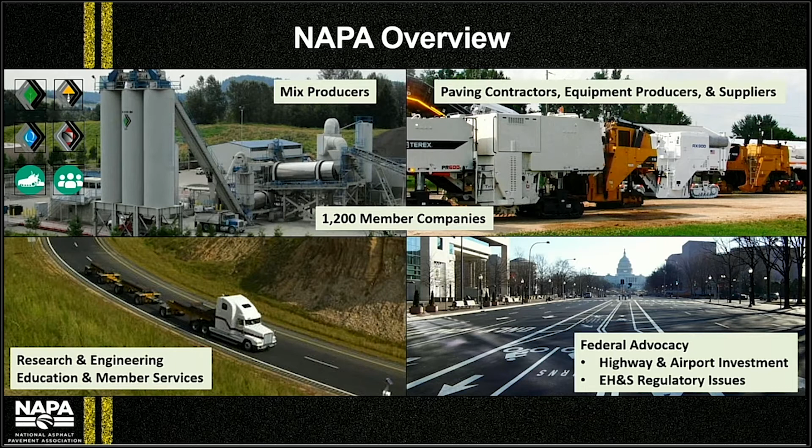Well, I think the easiest thing is to start with the Federal Highways definition. They define this in a reference document they compiled a few years ago. They say that sustainable pavements should, one, achieve the engineering goals for which they're constructed, right? So if you're thinking about it from that perspective, you got to make it well. Sure, absolutely. Quality is job one, right? Yes. Two is preserve and ideally restore surrounding ecosystems.

So how can a pavement restore an ecosystem? You ever wonder about that? We've talked about that here. We've actually had some webinars on that. Absolutely. Interesting. So I like to think of porous pavement as being restorative, because you restore that natural hydrological function of rainwater recharging the groundwater underneath and not just running off into the storm drain system.

Yeah. And then the third one here is using financial, human, and environmental resources economically. Okay. What does this mean? It means don't waste, right? Don't waste time, don't waste money.

Don't waste the environment. Don't waste our natural resources that we have, right? That makes sense. Yeah, and then the last one is meeting human needs such as health, safety, equity, employment, comfort, and happiness. And I really like the happiness one.

Sure. Do pavements make you happy? They do when I'm driving on them. I sure hope so. My story about this is when I was in high school growing up in South Pennsylvania, Route 1, you probably know about Route 1 even if you don't live on the East Coast. Old concrete highway, you're driving down the road, all the joints. And I used to hate driving on Route 1.

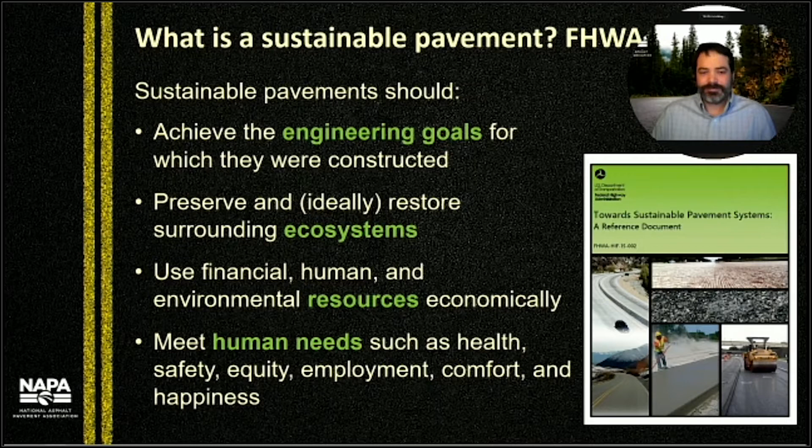There's a lot going on there, even further than a lot of people think about when we talk about sustainability. But there's other terms out there now as well, like EPD, LCA. So help us understand a little bit more about what those terms mean as we move forward through this program. Yeah, good question. When you think about sustainability, one of the things that people want to do is quantify it. What are the total impacts in a real number that you can attribute to a material or pavement. And you do that through what's called a life cycle assessment.

Okay. Now, an EPD, all it is is an LCA that meets certain requirements, which are described in something called a set of product category rules for individual types of products. And it meets all the requirements for conducting that LCA, and then it discloses them in a report called an EPD. That's the declaration, Environmental Product Declaration.

And an EPD, in most cases, is only looking at those first initial life cycle stages. Materials, what are the impacts of extracting and processing the raw materials? So this is the aggregate production and binder production, for our case, transporting those materials to your plant, and then your plant operations. So an environmental product declaration, it's not just an asphalt thing.

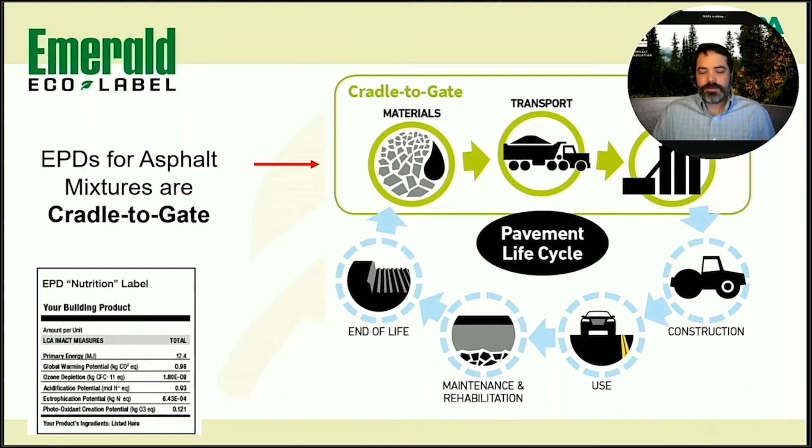I mean, traffic and use, it's really kind of a wild card as far as trying to get a hold of that. But how detailed does this process get? Yeah, good question. So we do focus on those initial life cycle stages because that's what we have control over. The other ones, you're going to start looking at the agency to do that full life cycle assessment for their road, right? It's more of a road thing.

Okay. But getting into the EPD itself, this is an example of one of the data tables that's going to be in the EPD for an asphalt mix. The whole thing's about 5 pages long, and there's a few data tables. There's a lot of description. But this is the one that most people tend to be interested in. And what you see here is a number of environmental impact categories on the left. The first one is the global warming potential, and that's in kilograms of CO2 equivalent. So it takes all the nitrous oxide, methane, and CO2 emissions and other greenhouse gas emissions and puts them into a single unit that makes it easy to compare.

Okay. And then there's other impact categories like ozone depletion. Remember the hole in the ozone layer back in the 90s? We were all concerned about that. Yep. Acidification for acid rain. Eutrophication, that's the dead zone, right, off of the Mississippi Delta, for example, and the Gulf. Oh, okay. So that's that eutrophication potential. So these are some of the things, and the smog is going to be obviously the direct smog producing emissions.

Well, and then this is, go ahead. This is quantified then for each of those first three stages. A1 is materials, A2 is transport, and A3 is mix production. So then the sum of those is the impact for each one of those different areas then? Correct. Gotcha.

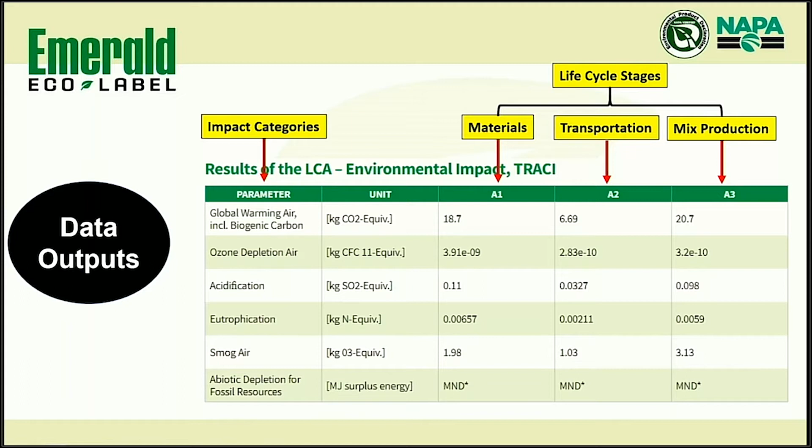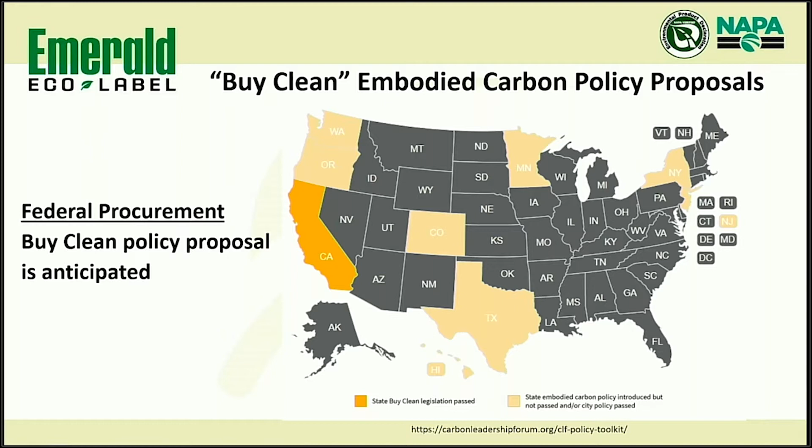But so what are we going to use? What's the purpose? What do we use the label for? So this initially started because the U.S. Green Building Council back in, I want to say 2012 or so, was putting together a revision for their LEED program. And they said, in this next version of LEED, we're gonna use EPDs as part of our credit criteria for earning credits. It took them a long time to revise the actual LEED program to do that. But now most of the green rating systems, LEED and others, are all using EPDs.

But also agencies are looking at it potentially for decision making. And the first one that's doing this is California right now. They've actually passed an act. Their act does not apply directly to asphalt, but Caltrans is collecting EPDs for transportation projects, including asphalt and aggregates. Okay. And that's on a pilot basis. So it's not a kind of regulatory requirement, but they're just doing it because they say we want to manage this at the agency level and not be kind of constrained by state law.

And then the lightly shaded yellow on this map, these are all places where there have been either state or local proposals for similar legislation. So City of Austin had a proposal a couple of years ago. That's why they're on here. More importantly, there's currently a draft bill that's been introduced to the House on a federal buy clean policy. And there's also in the works, the GSA, from what I've been told, is planning to put together a proposal to incorporate EPDs into direct federal procurement. So this would be anything you're doing with national parks, DOD facilities, presumably, right? So it's coming. It's on the horizon.

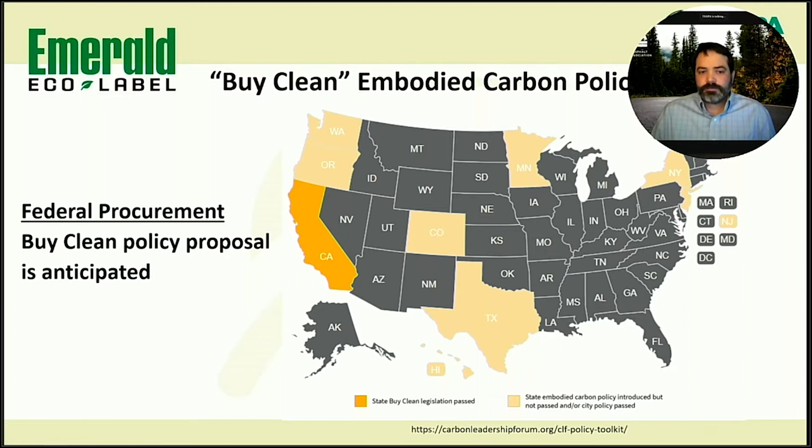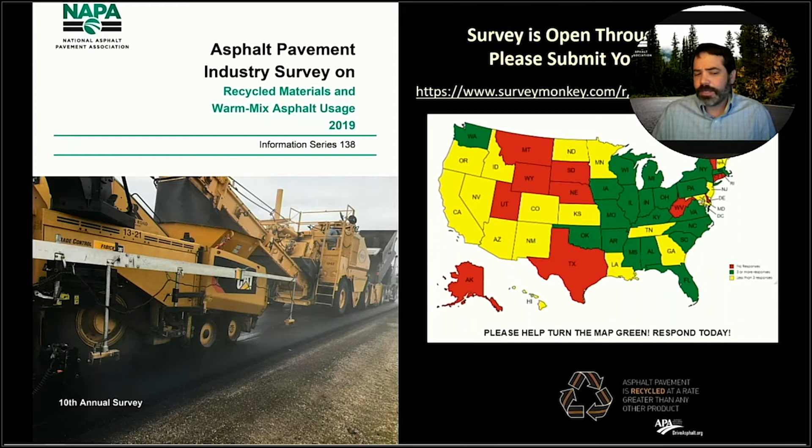So, all right. Given all that, let's talk a little bit more about asphalt and maybe some of the sustainable features involved therein. So I think one of the things that I love about this industry is our history of recycling. If you're in this industry, we use a lot of RAP. I think nationwide in 2019, almost 90 million tons of RAP was used. That's a lot of material.

Is it true? I've read this a couple places. Is it true that asphalt is recycled more than all the other major recycled materials together? Like recycling paper and plastic and steel. If that's true, that's crazy. That's a big number. So there's a few different ways to cut it, and in some measures, yes, that would be the case. To me, the measure where we're the leader is the percentage of material generated that's recycled. So that's where we're clearly a leader.

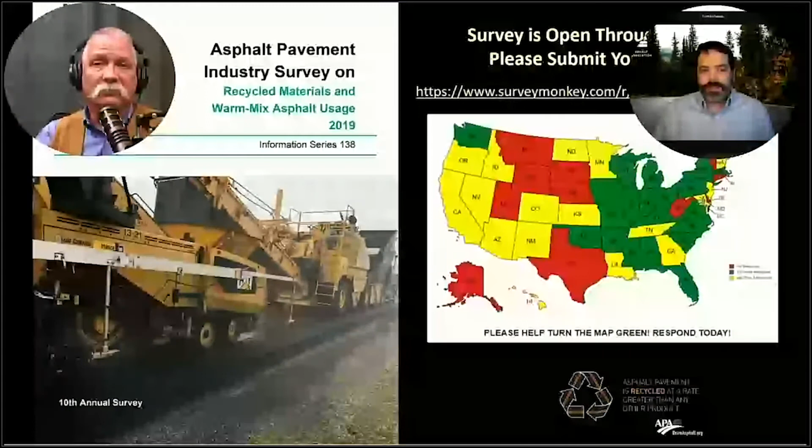Okay. You look at concrete, there's more concrete recycled technically per year, but most of that's going into low value aggregate materials. The difference with asphalt is that you're reusing that cementitious property of the binder, right? And that's at the highest level you can. Exactly. Highest and best use. That's it. Highest and best use.

I was trying to remember what that was. So we're actually getting the full value back out of that material, where some other materials are used for waste, or they're burned. Something's done with it, they're not just thrown away, but they're really not using it back into the actual product in the way it was originally designed to be used. And I think that's a pretty cool thing about our product.

Right. So one of the things that we do every year, for now 10 years, we've been collecting industry data on how much recycling we do, whether it's RAP or RAS or other materials, and also our warm mix usage. My call to action for folks from Texas watching this is we're collecting our data. You see Texas on this map is red. It's a little bit out of date, from a couple weeks ago. At that time, we hadn't received any responses.

Oh, that's not Texas good. All right, boys, step up, cowboy up.

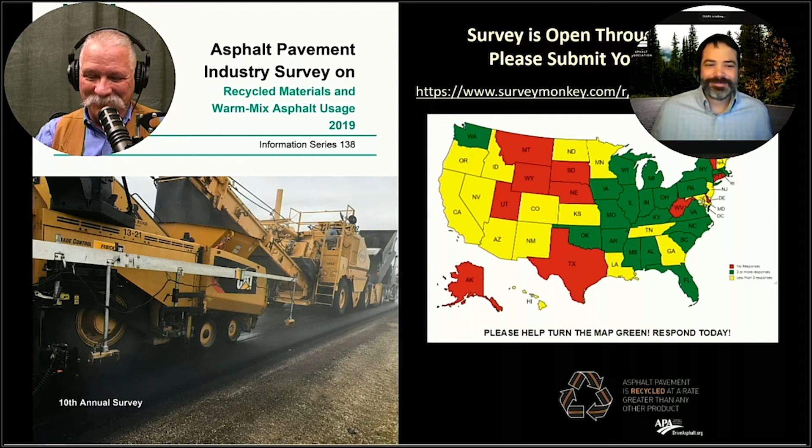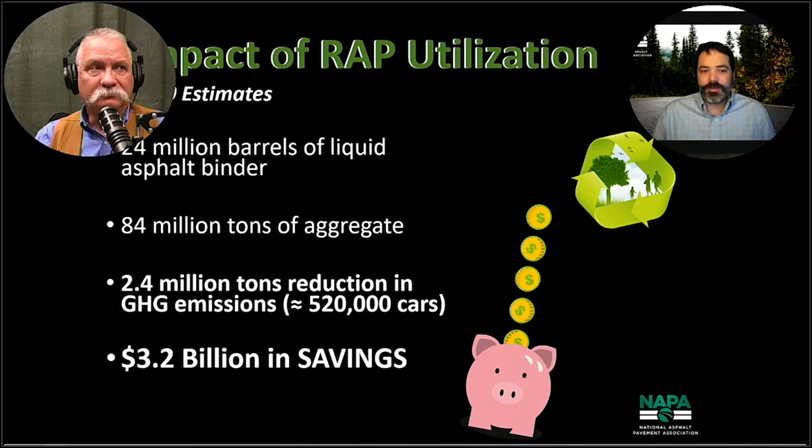We hear you. So as far as the benefits for asphalt and using RAP in particular, this is thinking about that circular economy, using our own materials back into our products. 24 million barrels of liquid asphalt binder that you don't have to extract out of the ground anymore and make into your product. 84 million tons of aggregate. So by reducing the need for these raw materials, you're reducing greenhouse gas emissions. What we calculated in 2019 was almost 2.5 million metric tons of greenhouse gas emission reduction.

And that's the equivalent of over 500,000 cars, right? So that's a pretty big impact.

Yeah, that's about how many are on I-35 at rush hour around Austin. I've been in Austin at rush hour, and I would say it rivals Honolulu.

So that's pretty bad. But it's not just that we're reducing greenhouse gas emissions, we're saving money at it. If you look at the value of those raw materials that we're replacing, it's over $3 billion in value as a country. So that's tax dollars that we can use to build more roads, rehabilitate other things, and keep things at a higher level of serviceability. So yeah, that's good stuff.

So yeah, there's great value to recycling, as you're showing here, from an environmental, an economic, and also an engineering side. So right on. So obviously, big numbers here.

So what else does asphalt offer as far as on the sustainability side? Well, when you think about greenhouse gas emissions in particular, what's important to remember is that the pavement is part of the transportation industry in that sense, that we're providing the groundwork, the infrastructure. Right. And so this graph, there's kind of a lot going on here, so I'll break it down real quick. Okay. This was done back in 2003 by Colas, right? It's an asphalt mix producer, and this is their European parent company that did this analysis.

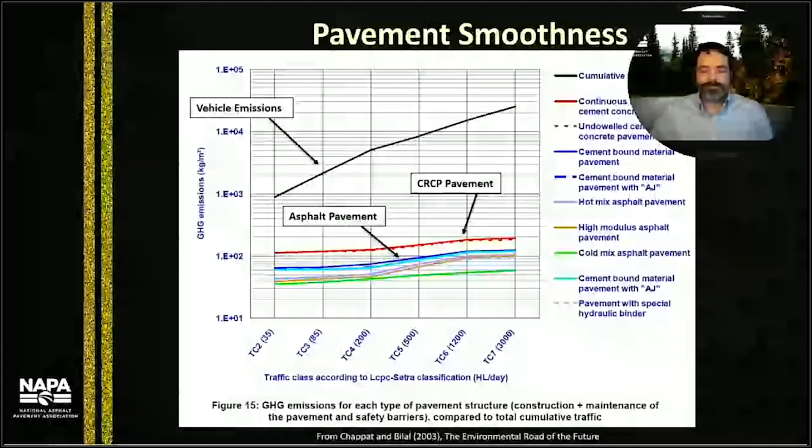So, all right, we're comparing smoothness, we're comparing vehicle emissions to pavement types and the ability to make pavements. And we know asphalt has got a smooth ride, and we can make it an extraordinarily smooth ride. But let's get back to the sustainability discussion. How do all of these things tie together?

So this is some work that was done by the UC Davis Pavement Research Center in California, for Caltrans, the California Department of Transportation. And they looked at about a half a dozen different potential strategies that the department was considering for reducing greenhouse gas emissions. And you can see some of these are, the first one, strategy four, the blue, is increasing the allowable RAP in asphalt mixes to 50% using a soy oil-based rejuvenator.

Okay. And then they did some other ones, some of these are a little exotic, piezoelectric energy harvesting underneath pavements, using the state right-of-way for renewable energy, right? And then one of them, the green one there, is optimizing their pavement maintenance schedule to improve smoothness and reduce fuel. Oh, okay, sure.

So this type of graph is referred to as a supply curve, and it's a way to look at both the economic and the environmental, or in this case, greenhouse gas emissions associated with different scenarios. And the vertical axis on the left tells you the cost effectiveness of a given program. And the negative numbers for the blue for this scenario for high RAP mix design tells you that the agency is going to save money while they're doing this. Right? So the more negative it is, the more positive it is actually. Right. Exactly. Gotcha. So in this case, using RAP was the most cost effective of the six different technologies they looked at.

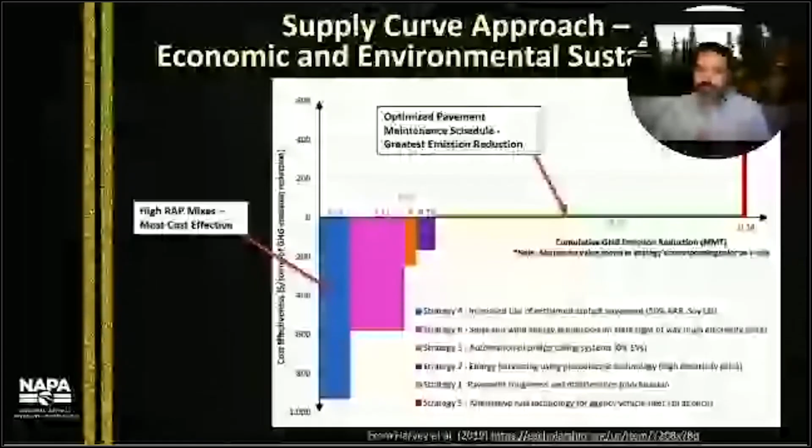And the horizontal x-axis is telling you the total amount of greenhouse gas emissions that can be reduced. So if you're really wide, then that's a big reduction. And if you're narrow, then that's a small reduction. And the most effective thing here is that option of optimizing pavement smoothness, you're optimizing your maintenance schedule. Now, this had a slightly positive economic value here, and it wasn't very big, but it was positive.

But this is only looking at the agency's cost. It's not looking at the benefit from users of reduced vehicle fuel consumption, reduced wear and tear, and all that sort of thing. I got you. So if that was in there, that would also be a very large negative. So I see your point there. That wide horizontal line is very significant. They may not see the cost, but there's a very significant benefit to have that. But there is a significant cost savings to the agency on using higher RAP percentages as well.

So okay, very good. That's very interesting. I've never seen a curve like that. I try to learn something new every day, and I got it now. So we get the benefit of the RAP, the engineering properties. It's got good residual properties. There's a cost savings there as well. But they can also be used to actually make pavements last longer. So let's talk a little bit about long life pavements and perpetual concepts. So let's see what you got.

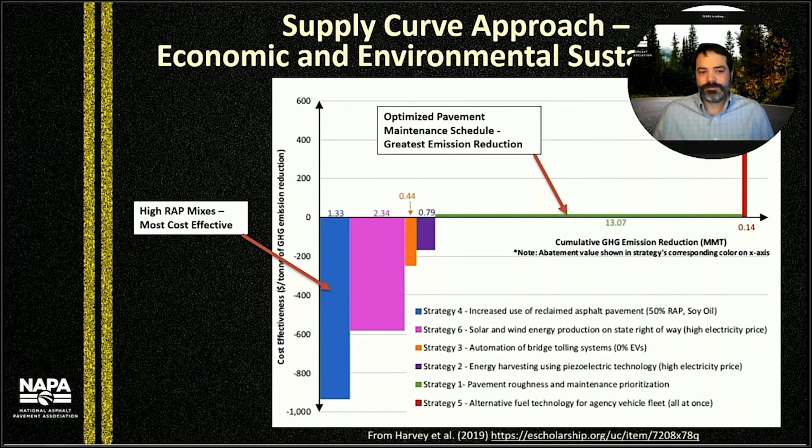So perpetual pavements, if you're not familiar with this term, this is designing a pavement so that it's never going to have a structural failure. You're never going to get that structural rutting or bottom-up structural cracking. And to do this, you're typically making it a little bit thicker than a traditional pavement, instead of designing it for 20 years, you're designing for a much longer useful life. And you might have specific layers that you wouldn't necessarily have in a conventional pavement design. Like you have a rich asphalt bottom layer to prevent that bottom-up fatigue cracking. So it's going to help self-heal or not have enough strain that it's going to crack from the bottom up. So that's a basic concept.

So by doing this, you now have a thicker, stronger pavement structure, and it's going to last a lot longer. And all you ever have to do is go in and resurface the upper couple inches of surface wearing course. Gotcha. So this is a case study that was done by the Federal Highway Administration. Just last year, they published it for a highway in Iowa, where they were comparing a perpetual pavement design to a conventional alternative. And they found that the initial financial cost was a little bit higher on the front end, but the life cycle maintenance reduction ended up saving about 20% of the life cycle cost.

Wow. And they also found that most of the environmental impacts they analyzed, including the greenhouse gas reduction, was about 20% as well. So here you are, you're saving money with your life cycle cost reduction, and reducing greenhouse gas emissions and other environmental impacts. Sounds like something we need to be looking at. I know TxDOT has a perpetual pavement concept in their design guide, so I think we need to look a little bit more at that.

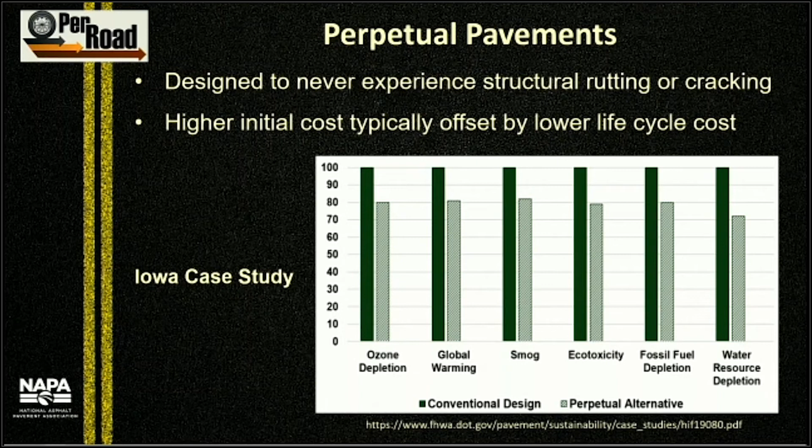So we've got about 5 minutes left or so. So let's kind of shift gears a little bit. I keep hearing this word resilience, and I want to take a little bit of time and delve into that just a little bit. So let's talk about resilience. Yeah, the hot topic for sure.

Yeah. So FHWA defines resilience as the ability to anticipate, prepare for, and adapt to changing conditions and withstand, respond to, and recover rapidly from disruptions. So it's not just about hardening your pavement if you're talking about infrastructure. It's about being able to rapidly recover when you do have damages to your system. You've got to keep that in mind. It's a combination of both of those.

Okay. So let's go on to that next slide because I think it's got some good information here. So when you think about responding to an event, the first thing is you want to be able to get back and repair your road quickly. And there's lots of great case studies of using asphalt to restore service and get everyone running again quickly. So that speed of construction is super important. Sure. From that side.

And agencies can't afford to harden all the roads, right? You kind of have to say, we're just going to have to let some of these roads fail, maybe most of them, and then fix them when they're broken. So this is a really key asset for our industry. Gotcha. And then there's different things you can do to use warm mix asphalt in cold weather or long distances. We talked about warm mix last week. Yep, and that was a great presentation. And so this is another resilient tool that you can have for repairing pavements.

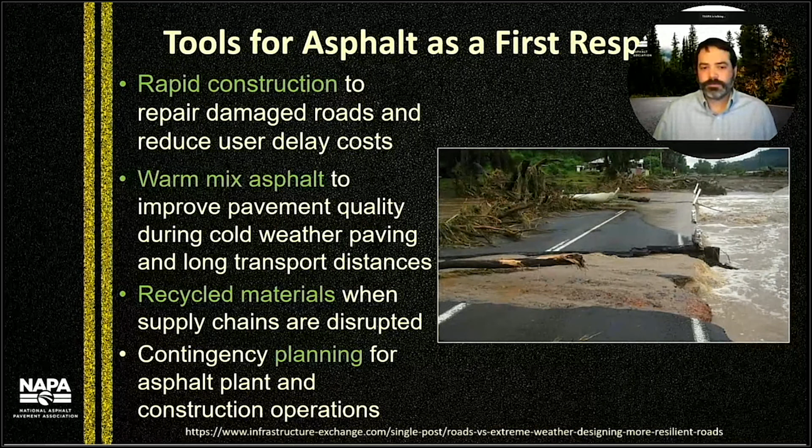So I'm getting the theme that asphalt's got a lot to offer in these areas. So let's keep talking a little bit more. Yeah, so one of the key things, if you want to harden a pavement, we talked about perpetual pavements. It's a great way to harden your pavement, strengthen it. It's a really good option if you're in a coastal environment. I know Texas has a lot of coastline where sea level rise is a concern.

And with sea level rise, you might get groundwater intrusion coming in and saturating your base or subgrade material, which can weaken the pavement structure. So perpetual pavement is a really good option to consider when you have that concern. Or deep reconstruction, where you're stabilizing the base and that sort of thing.

Yeah, we've just looked at some work that we had one of the universities do for us, and they're talking about the attributes of actually stabilizing the subgrade and what the actual benefit of that is, as opposed to using an unbound. So as far as pavement life, in addition to hardening, that gives us another tool in the toolbox to look at some of this stuff and keep moving forward.

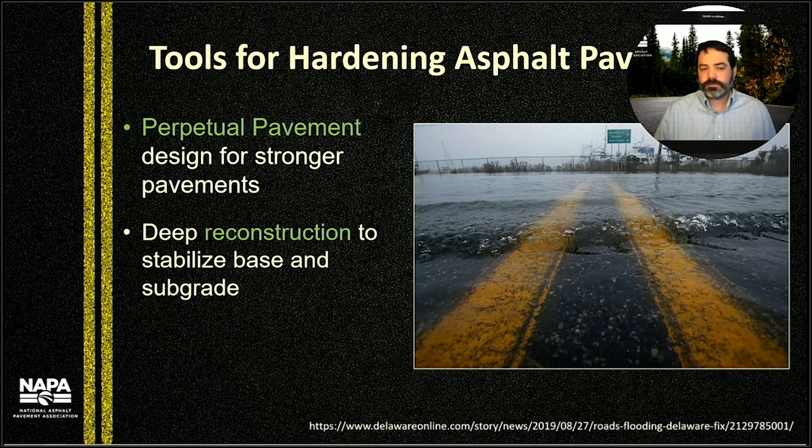So what are the steps of working this out as far as resilience goes? So there's some other tools that we have available too. Some of them are looking at your design of your pavement to begin with. So if you're, say, using Pavement ME for your design software, or using LTPPBind to select your binder type, those use climate data in the software suites. Right. But they're using historical climate data.

Okay. There's some new techniques coming out. They haven't been really widely implemented, but there's definitely states that are looking at it and kind of starting to incorporate this, using future climate models to inform your pavement design. Okay. Looking back and forward.

Right, okay. So I know Federal Highways did a case study in Texas a few years ago on this, and they found that the biggest issue was maybe in about the year 2040 for a highway that was being designed, you'd have to bump your binder grade from a PG70 to a PG76. Okay. So it's a relatively modest change, but they were able to say this is when we think it's going to happen, and they can incorporate that into their cost planning, that sort of thing.

Well, the performance graded binders really are a benefit, and we've already seen a lot of surfacings go to a 76-22, and we're even talking about going higher in some areas. So I think in that case we might even be a little bit ahead of the curve.

Yeah, and you could call it a climate adaptable material, right? Because as the climate changes, when you maintain that road, it's really only the upper couple inches of that surface that's going to get really hot anyway from hotter temperatures. Right. So it's an opportunity every 10, 15, 20 years, whatever your maintenance cycle might be, to go in and make that change. So you can upgrade. Right. You can upgrade. Awesome.

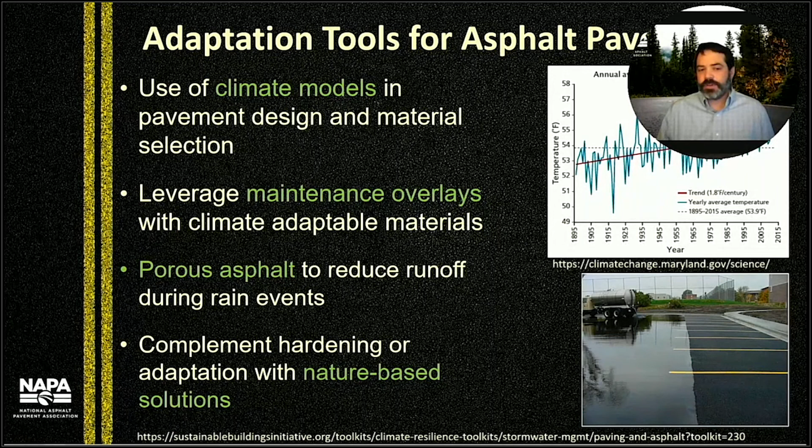Awesome. Yeah. And then the other thing is this porous asphalt. I think this is a really big deal because you can use porous asphalt to reduce a watershed's impervious surface area. That's a great way to restore that natural hydrological cycle and reduce the flooding risk. Good deal. All right.

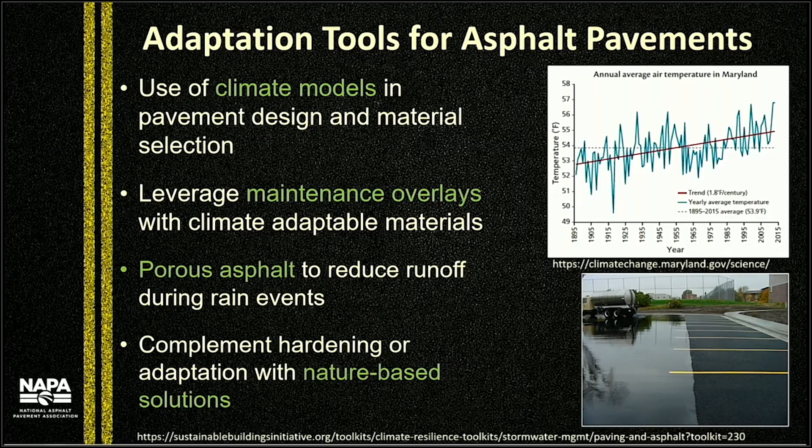Well, it looks like asphalt's pretty well suited to do a whole bunch of different things, and it's always great to be in an industry that has never shied away to step up and take on a task of trying to improve their product. And looks like we still got some work to do. It's a great place to work in this industry, and we love it.

So. Closing comments, Joseph. Again, we enjoyed our time together here. Time has just shot away real quick as it normally does. Closing comments, call to action. Where should we go from here?